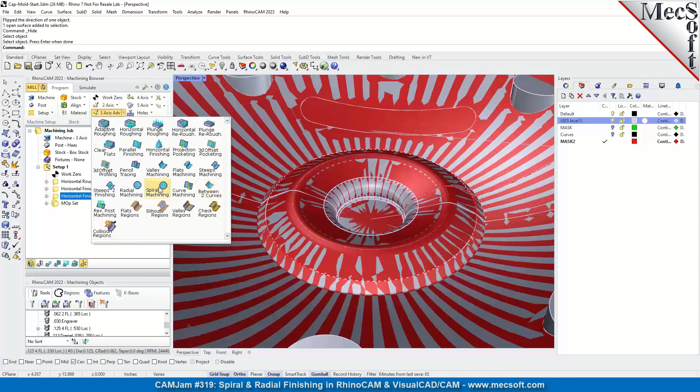Radial spiral. Again, we're going to contain it to this perimeter, and we're going to use the 1/8 inch ball mill for the cut parameters. We're going to use a climb cut direction, starting on the inside and working our way out. For the center, by default it actually calculates the center of your part, but you can tell it where the center is.

We're going to pick that, and with the object snap on, we're going to pick a point. So that's going to be our center point.

We're going to do a step over, I'll say 50 thousandths. I won't do an actual surface finish pass since it'll take more time to calculate. The Z depth, we already had it roughed out, so we're not going to have any additional Z depth, just one depth right on the part itself. And then for the entry and exit, we'll leave that. Let's just generate that.

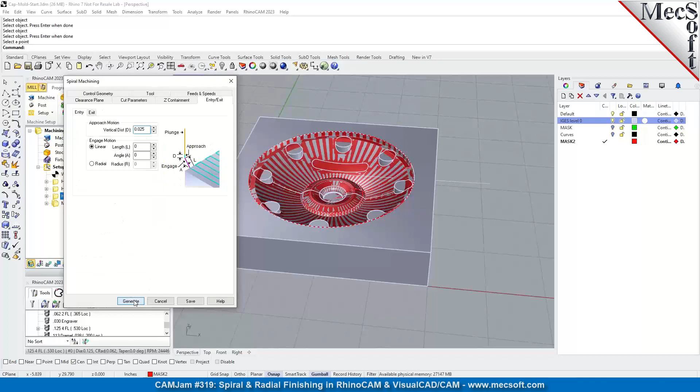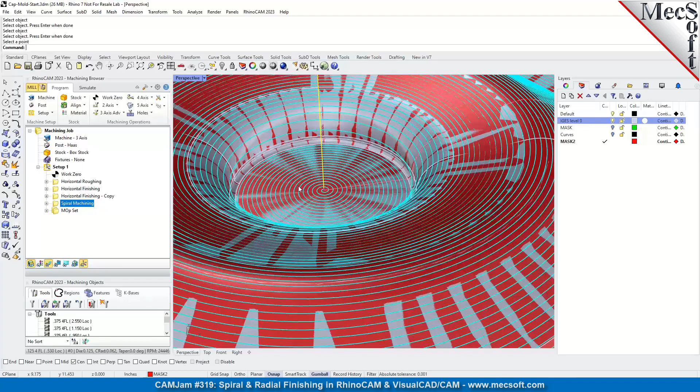Okay, so on the spiral, you'll see that it started at the center because we said we want to work our way from the center outward. So the spiral starts here and works its way around based on the step over, all the way up to the last point right here.

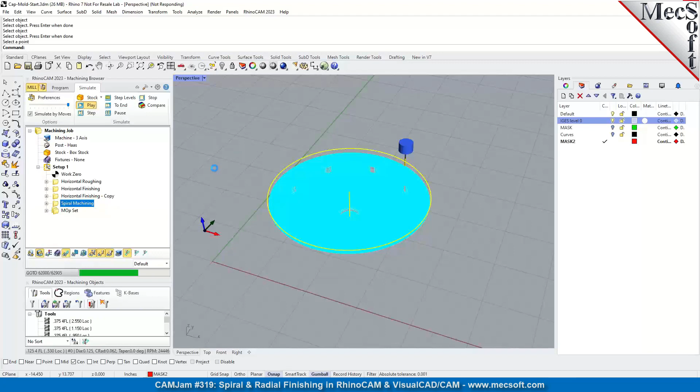Okay, so let's go ahead and simulate that. Let's suppress that since we don't want that to be into play, and let's run that again with the toolpath turned off. Play. So the tool is working its way around, starting at the center, going all the way up the sidewalls.

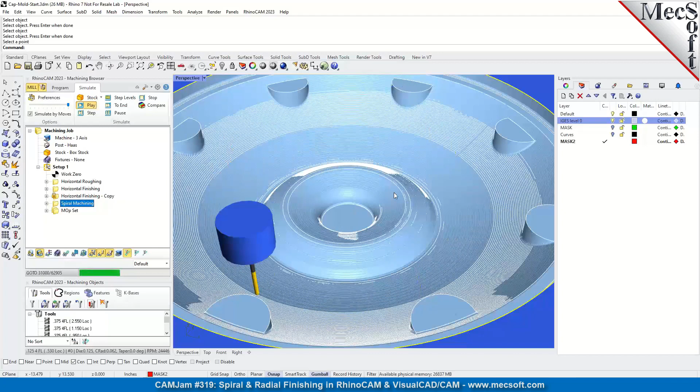And the masking surface is doing its job. The program doesn't even know there's a pocket in here, it doesn't know there's any material behind the surface. So that's what we want.

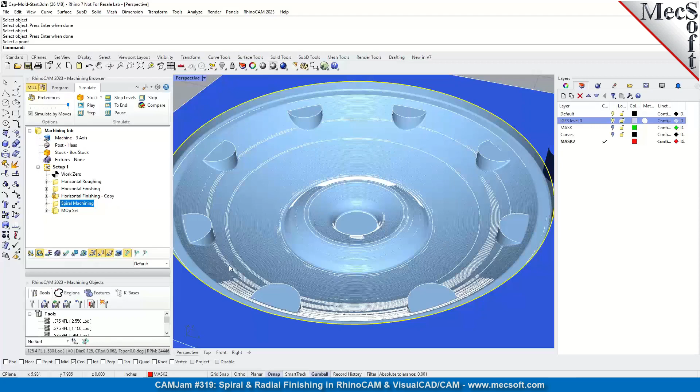So we're going to cut those out separately. Let's go ahead, there's the spiral. Let's do the radial machining. It's basically the same procedure, but you're working from a center point out.

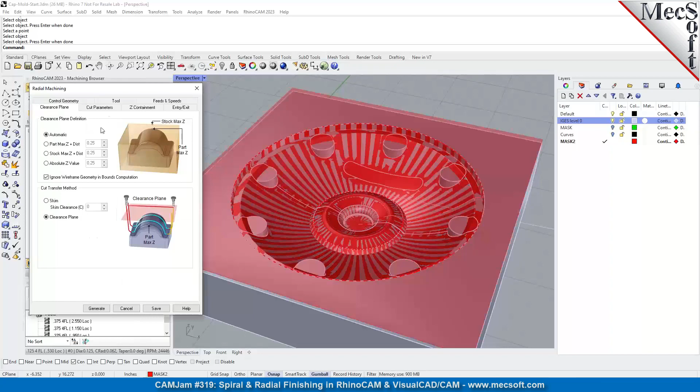So let's go ahead and create our perimeter curve or select our containment curve. We're going to use the same tool and cut parameters, the same tolerance of 1/1000th. We'll do a zigzag cut pattern, and we're going to set the center point again.

Okay, and then for the step over, 50 thousandths, no Z containment, we'll just generate that.

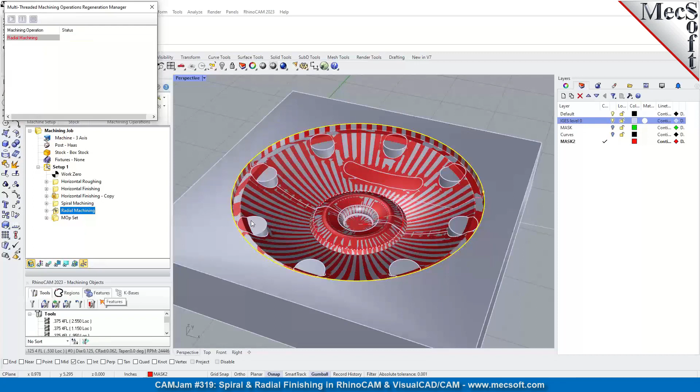Okay, so here's our radial. You'll see if you can zoom in there now. It starts at the center and runs its way out to the perimeter curve that we selected.

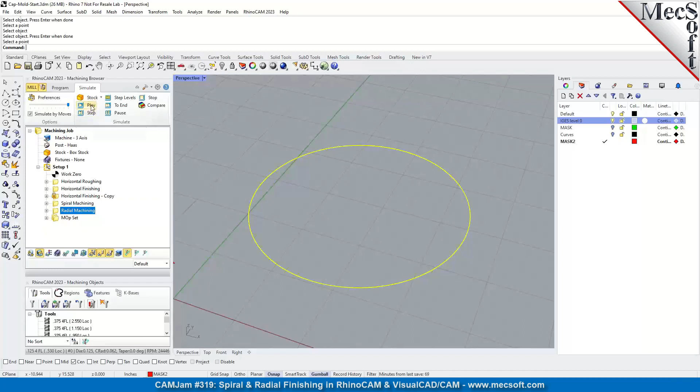Okay, so let's go ahead and simulate that real quick. You see that it's going up and down from the center to the perimeter. Okay, let's go ahead and pause that, we don't really need to simulate it all. If you zoom in, you'll see the surface finish.

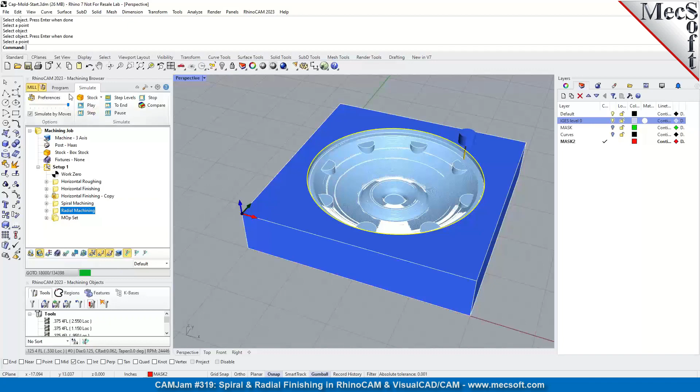Okay, so that's basically the 3-axis, but we got more work to do because we want to program these additional pockets and these pockets up here. At this point, we don't need the masking surface anymore, so we're going to turn that off, and go ahead and stop the simulation.